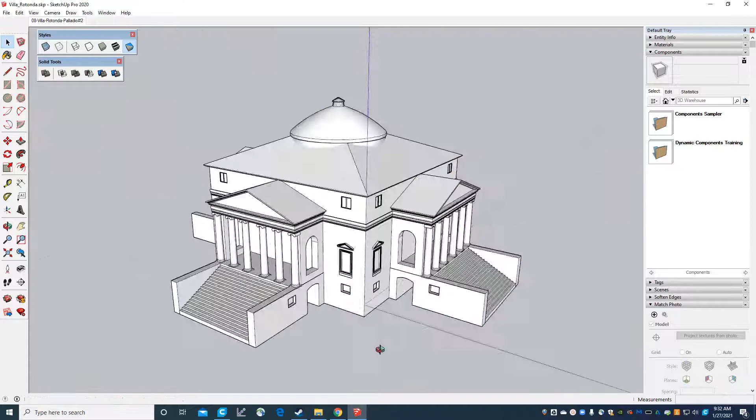The model that we made of Villa Rotonda, we chunked this guy together, if you remember the process, for those of you that were following along, of a big centralized chunk. We have duplicated a bunch of porches. We have the overall molding around the sides. In order for us to 3D print this, we need to tidy this up. There's a whole lot of interior geometry. We have a bunch of different chunky parts that we need to deal with.

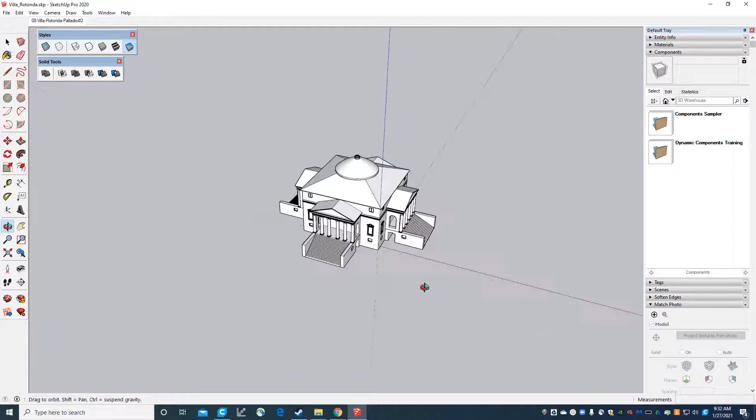What I would like to do is to go ahead and unhide what we're actually looking at. These are the component parts of what we had built through that SketchUp workshop, for those of you that follow along in the videos. What we need to do is to take all of these chunks, combine them together, and get them to be something like this, which is as clean as it can possibly get. There's no additional lines inside. I often refer to this as almost like a sandcastle mold of the building that we actually want to print.

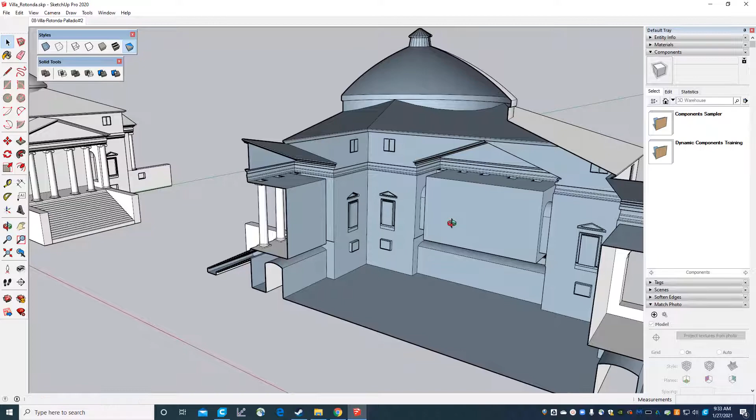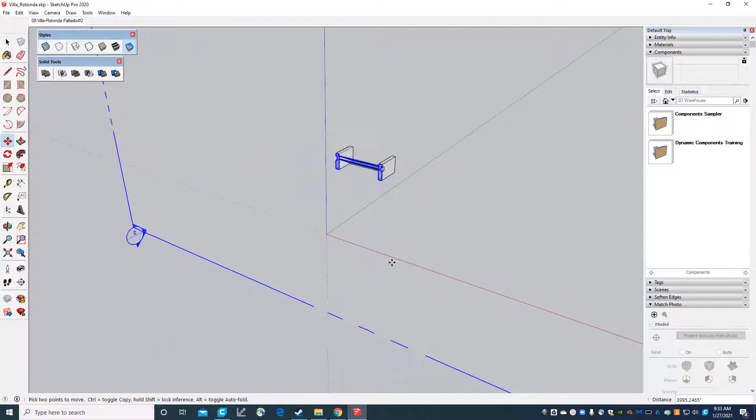From the outside, these two look identical. From the inside, if we were to throw a section plane into this building, we would see that there's a whole lot of extra geometry that we can't have. There's too many additional lines, too many additional competing logic statements for the printer to figure out. And this is what I mean when I say that.

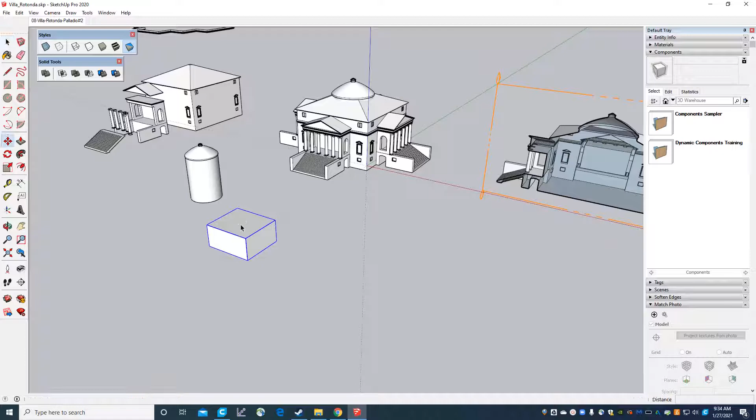We had at one point earlier on started working monochromatically. That was this little button up here. And monochromatically is whites and grays if you're using the default look of SketchUp. So I'll make this guy a group and then I'll combine them. I'll move them again and then we'll overlay a couple of these geometries. And what those colors tell SketchUp and will tell the 3D printer is what's on the inside and what's on the outside of your model.

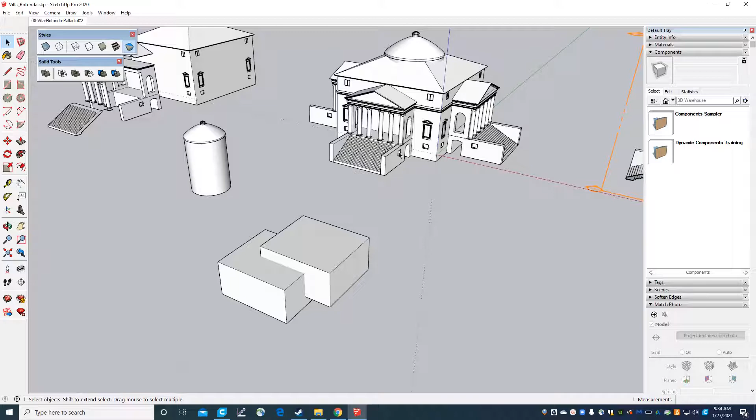Keep in mind, if we send this to the printer it's not going to say, oh, that's the model of a building, or that's the model of a cell, or that's a gear. The printer just actually looks at the mesh that we send it, the overall kind of geometric skins that we made, and is looking for inside of the shape and outside of the shape. Now, white is the outside of the shape. So when we fill in our model, the 3D printer will fill in inside of these cubes. And it won't put any plastic or extrude any filament on the outside of these cubes.

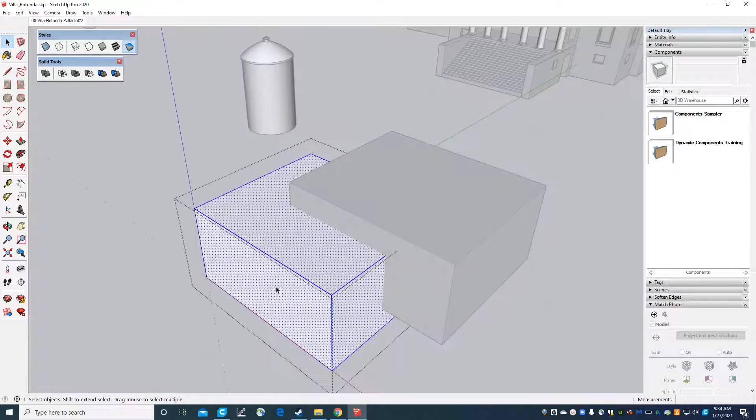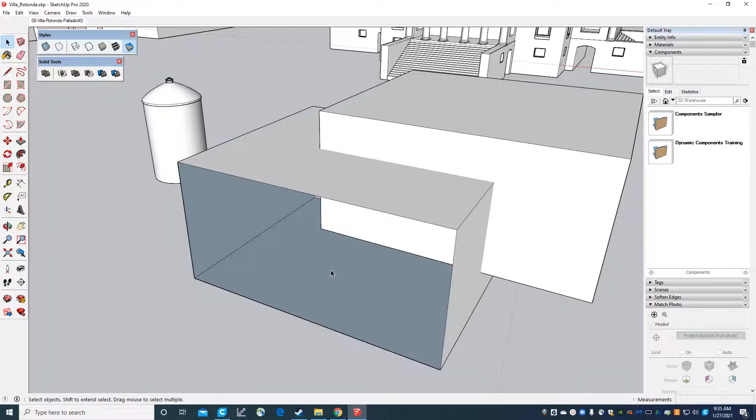But what I want you to do is take a look what happens inside if we just hide one of these walls. So if we look inside of this cube, there are areas in here where we're giving contradictory information to the printer. Right where my mouse is now, that's the outside of everything. It's not going to print anything there. But right where my mouse is now, this face, the floor of this cube and the left side of this cube are saying, hey, this area is the inside of this cube. Go ahead and fill this in with plastic.

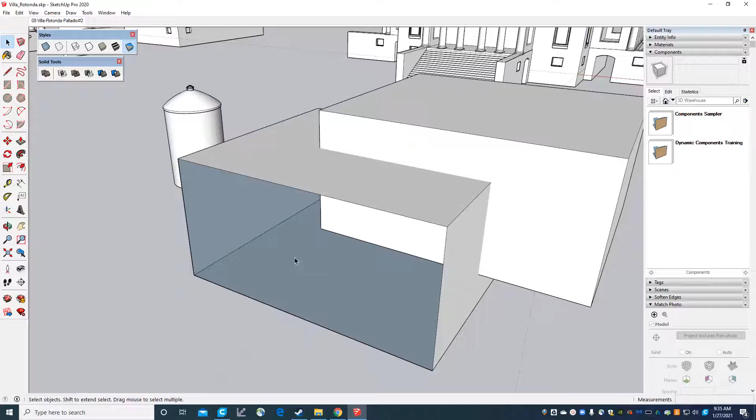Now, this face on this other cube is saying, hey, out here to my left or in front of me, that's the outside of a shape. So don't put any plastic there. So just these two cubes combined are already starting to present contradictory information to our printer. Every time we're giving our printer contradictory information to overcome, we're providing the opportunity for an error.

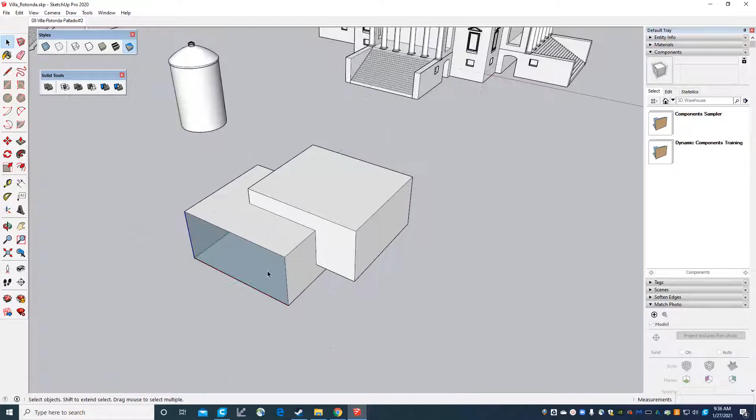So what we want to do is get in the habit of, if you recall, I mentioned these solid tools that we can use. We want to get to the stage where we can use these solid tools to combine our geometric shapes so that when we look at our exterior skin, there's no contradictory information on the inside. So everything in here is telling the printer, this is the inside, fill this with filament. This is the outside, don't put any filament there.

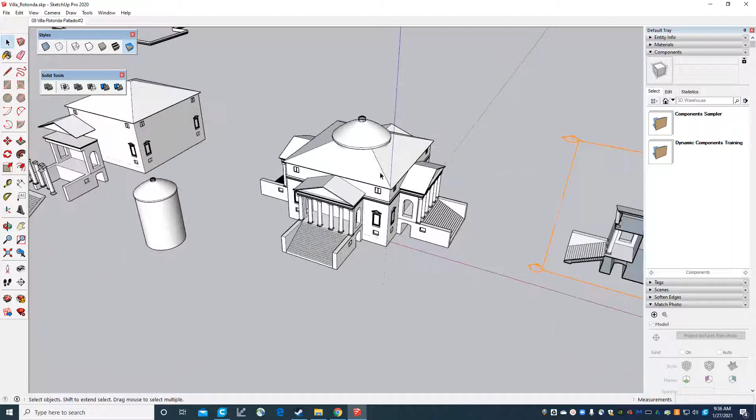Now, that example seems rather simplistic, but it's the same process that we're going to deal with when we look at these larger files. So here's our big model, and here are the shapes that our big model is dealing with. Some of these, if we were to float over our solid tools, that guy's, it's because I've grouped them together. So let me explode that group. So these are all our individual chunks that we have made while we've been modeling. And if we just click on the solid tools and float over them, they'll highlight if they're ready to go.

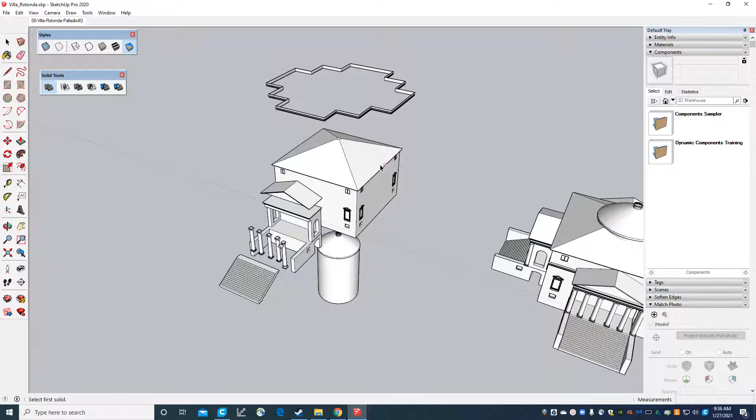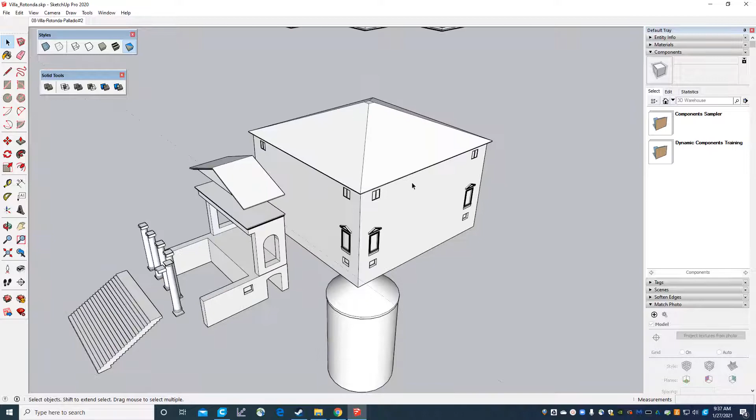So some of these are clean. Our porch is clean. That's clean. This column is. This column is not. Our main massing is not. So we need to figure out why. So let's take a look at the inside of this massing. Some of this we can do just by manually looking for problems. Some of it we might need to use some additional plugins that we can install, and we'll talk about going through those. So let's try to see if we can figure out why this guy is not a solid.

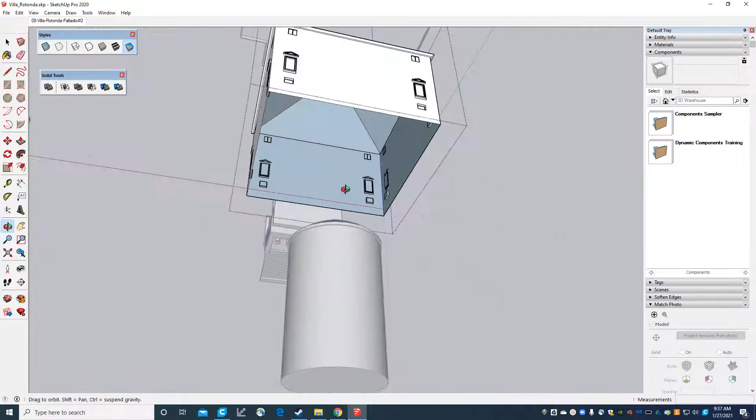So if we right click and say Edit Group, it seems like everything's okay. Let's take a look and see what we can find inside. If we look inside, seems okay.

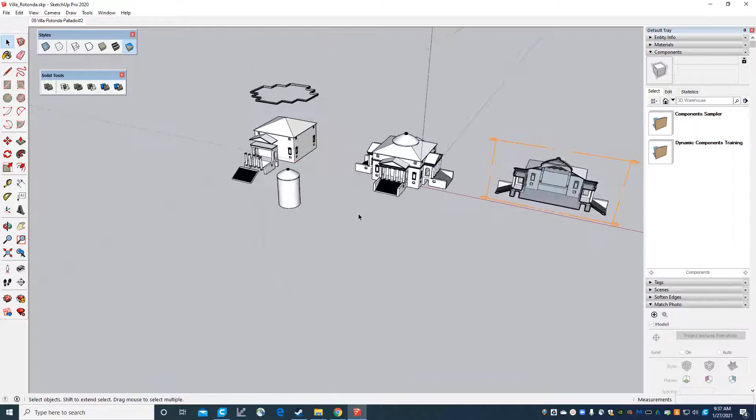So if you look inside, we have this extra line right here. This extra line, we need to tidy that out. So those are stray lines. Let's go and see what it says now that we've got that guy out of there. And right now that guy's tidy. So just that one line is going to keep SketchUp from recognizing that that's a shape that we can use as a solid with our solid tools.

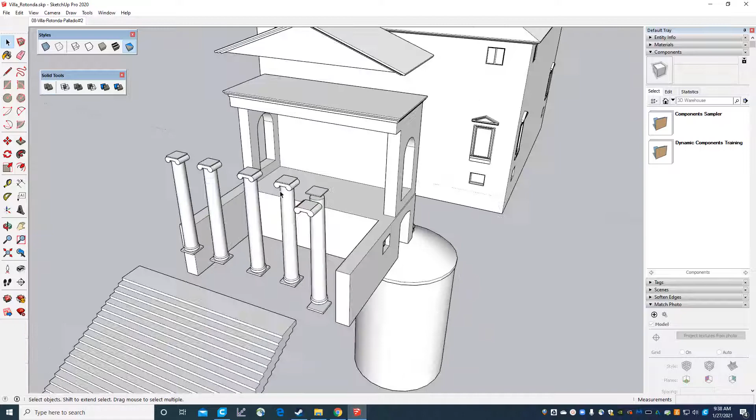Let's take a look here what we've got with these columns. Keep in mind these columns, this one's fine, so this is what we're going for. This one's not fine. So let's see what's going on with this guy. If we go to Edit Group, let's see if, okay, that top rectangle is good to go. The bottom rectangle is good to go. This middle shaft of our column is not, nor is the capital.

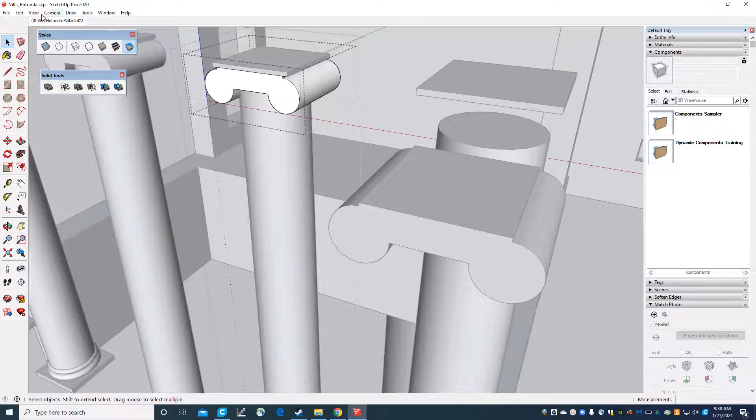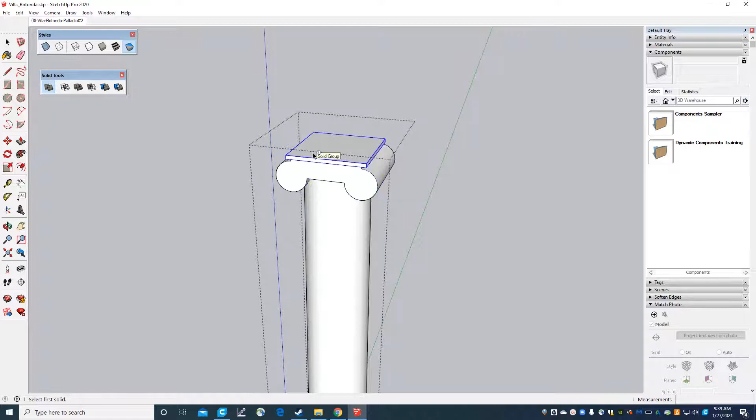So let's take a look at the capital. And right now we're going to go View, Component Edit, Hide Rest of Model. That gives us the opportunity to see what we're doing a little better. And right away I can see I left a couple of extra lines here. So let me delete those out. Let's take a look at the back, see if we see anything glaringly obvious. Nothing. So if we come back out of it, great, these guys are good to go. So I'm going to combine this one and this one, and we're all set.

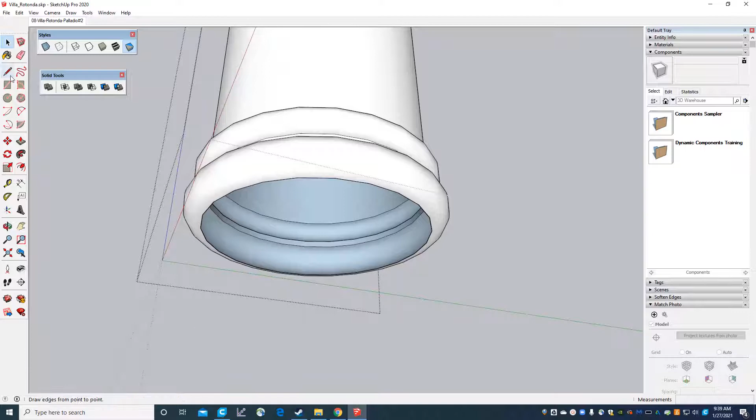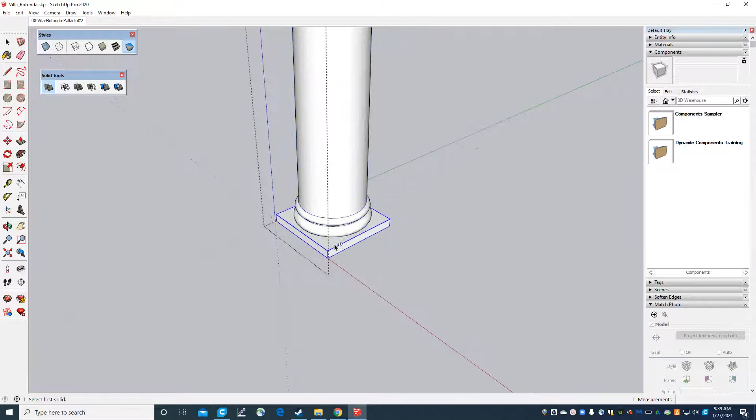Now our column, the shaft of our column still says it's not ready to fill, or it's not a solid yet. So if we take a look, see if we see any extra lines, and if we take a look at the bottom, we have a hole in the bottom. So we need to close that up. And we're going to close that up by just trying to draw all the way across from one endpoint to another endpoint. And now we don't need that line anymore. So let's see if that was what was wrong. If we use our solid tools, yep. So that's what it was looking for. We had a hole in the bottom of our column. So we can combine all of these.

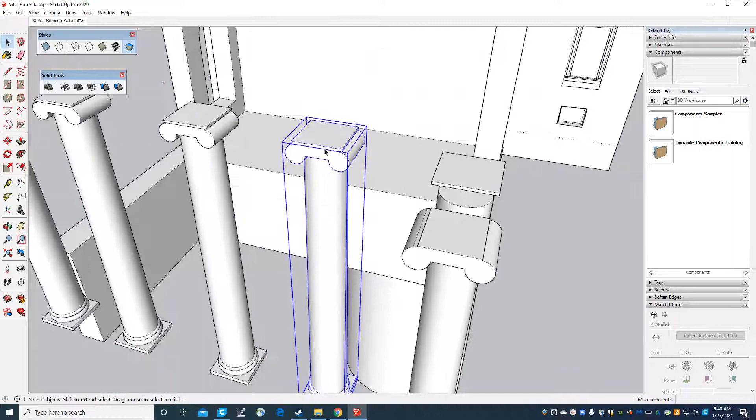Now if we take a look at this column that we have, let's use our solid tools, and that guy's ready to go. This one's not. So what we have is a situation where this one, if we right click and say Edit Group, what we wanted to have seen is Edit Component. Remember way back when we made a group versus component analysis, if we change a component, we change all of the components. So if we had made this a component at the beginning, all of them would have been fixed by fixing just this one.

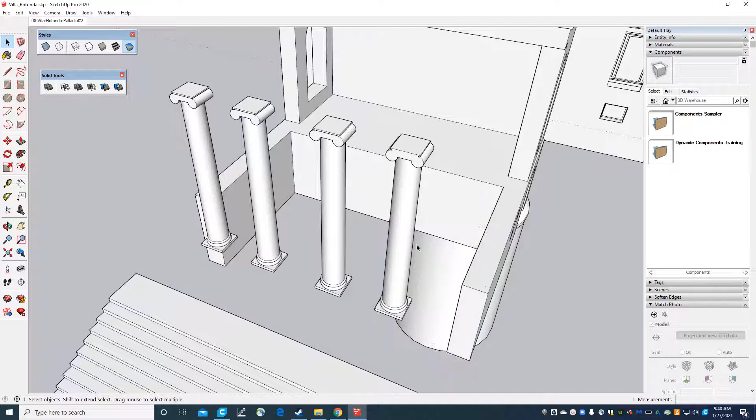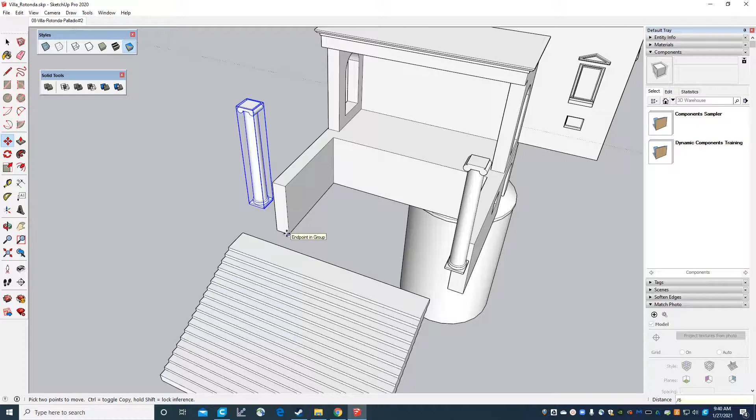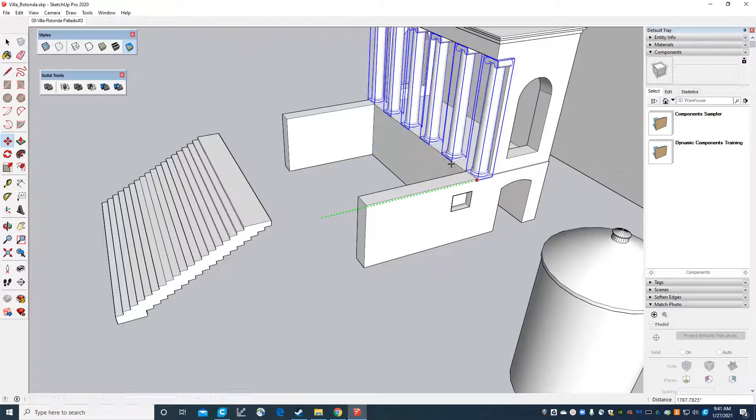But since we already know we have one that we like, we can delete these guys. Let's take the one that we do like, that we know is ready to go. Let's move it off to the side. Let's get rid of these. And we know we can go ahead and copy this guy. And we know we added 6 of them. So we're all set. So now we have columns that are solids that we can combine with our porch. So let's go ahead and grab those guys. Let's move them on into place. Let's combine those columns together as one big group. And then we'll combine those columns with the porch.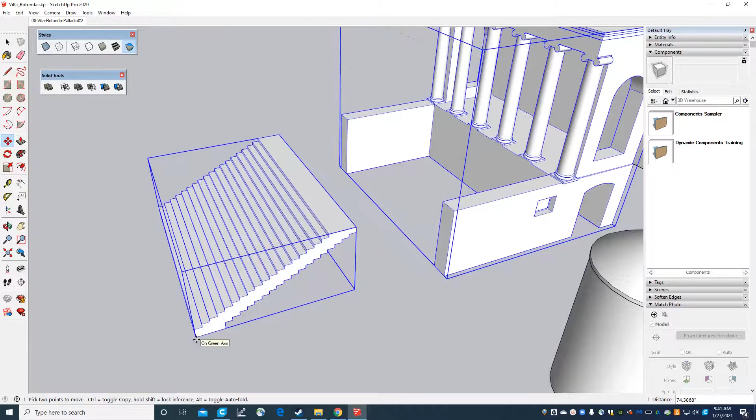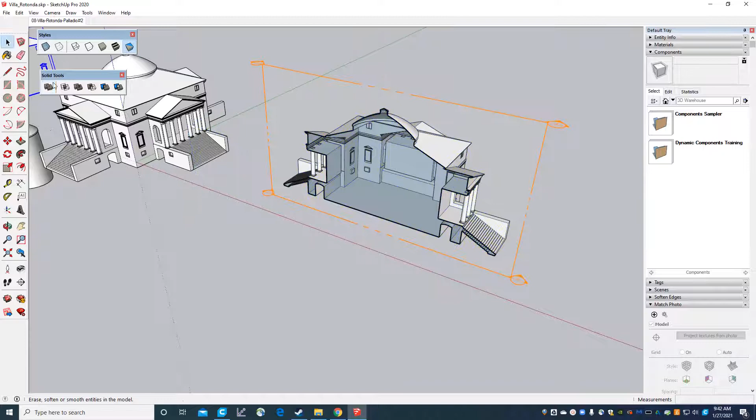Now that those columns are combined with the porch, we can go ahead and add the staircases on in. So add the staircases onto the porch. And we're just going to do the exact same thing. We're going to work our way all the way around, one chunk at a time, until we have all of our files combined into one big, solid, clean mass. And at this stage, we can take this guy. I'll delete the section plane that we're using. This guy is ready to send to the 3D printer. We would just go File, Export, the 3D model, and we'd export it as an STL file. And we'd be all set to go.

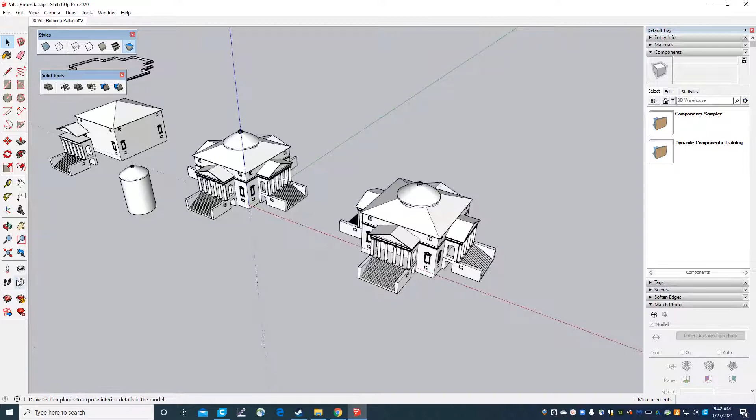So I hope that helps understanding the distinction between whether files are ready to send to a 3D printer, ways that we can go ahead and get things tidied up, how we can look for those kind of red flags and take it step by step, looking at our component parts, combining them into one solid file, and then sending them to the 3D printer to maximize all of the efforts that we just put in to learning SketchUp.